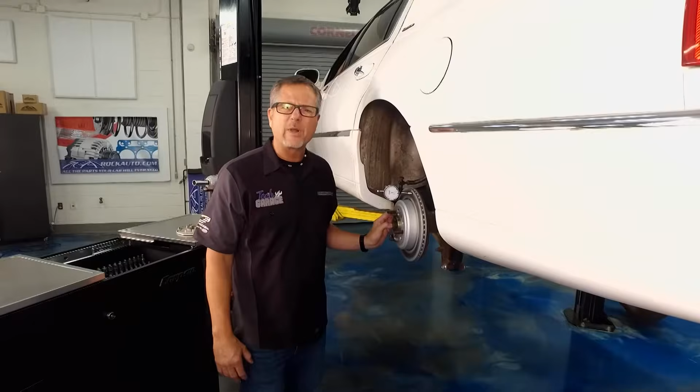Man, so much brake chatter, I almost chipped my teeth. We just did a brand new brake job, so we know the parts are good, but check this out. Holy mackerel, 43 thousandths run out in that hub assembly, rotor. Something's going on. Further diagnosis is needed today on Tech Garage.

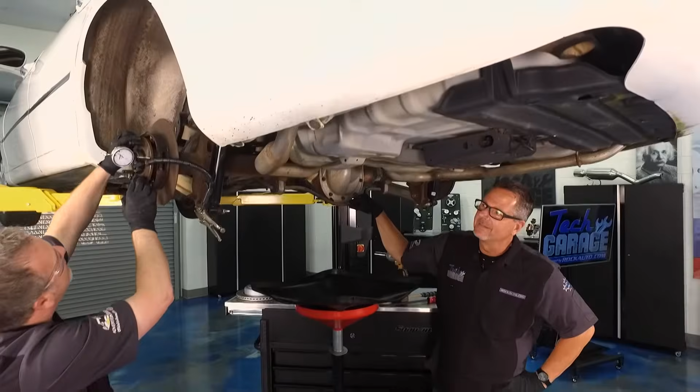Oh my goodness, Johnny, I found the run out. We took the rotor off, we know that wasn't the problem, and it's looking like it's from the hub back here, so somewhere in the axle. Boy, did you ever.

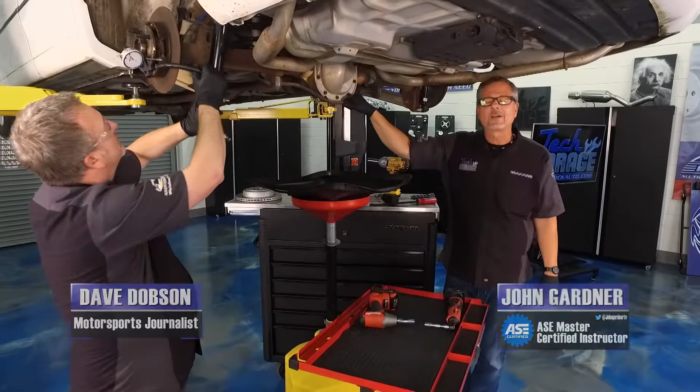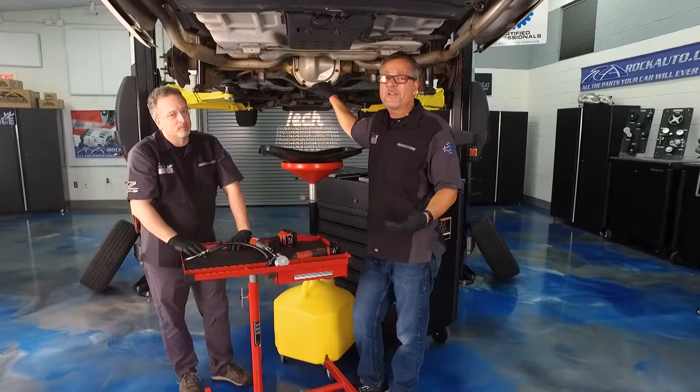Now you're probably wondering why we're starting the show with these black gloves on. Well, we know we're going to get goopy with some differential fluid. Yuck. What we need to do is, we actually had run out, chattering in the brakes. We took the rotor, measured it, we had a ton of run out. We had brand new parts from rockauto.com, so we know that wasn't the problem. So we went ahead a little bit further, diagnosed the hub, and the hub's warped.

Now, we don't know if it's the hub or the axle or what's going on, but Dave, we surely know we have to open up this differential and get this axle out of here.

Before we do that, how does it get like that? You hit a curb probably, I'm guessing. Me? Yeah, you hit a curb. No, sir, not it, not it.

But I can tell you, I think I've heard of cases where this happens if maybe there's a bumpy road, like big bumps, and you get on the power real hard. Yep, and there's some horsepower in this thing, so that can happen, things bouncing up and down. Absolutely, it's supposed to ride like a Lincoln. Right now, it's riding like a baby buggy.

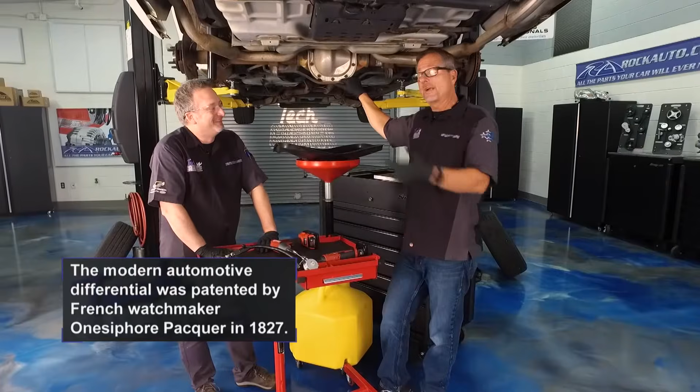But anyway, we're going to have to get into this differential and do that. So take a look at what we're going to do. We're actually going to go in here and take these bolts out. There's going to be a C-clip, Dave, that's going to hold that axle in. It could be bolted in or it could be C-clipped in, depends, we'll look when we get in there. But we need to take these bolts out, that's probably the first thing. You give me a hand, we'll start taking these out.

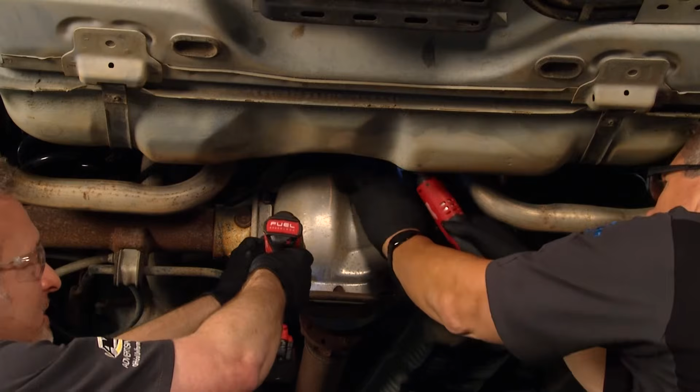Got it, there's fluid in here. This would be a good time to change it as well. So I guess it's all right that we're doing this anyway. Yeah, and when you change the fluid, we'll talk about it a little bit later, we got to make sure we have the right fluid. Sometimes there's additives, and like you said, there's a service interval for this anyway, so if you're servicing a differential, you're getting a little bonus as well.

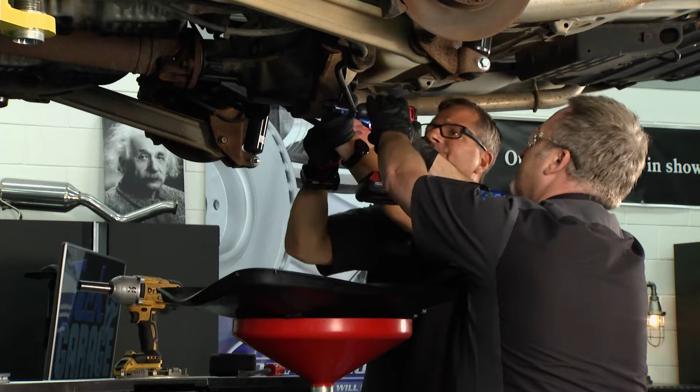Perfect. Now when it comes to these differentials, man, they could be either, bearings could be on the end with 4 bolts, a lot of Fords do that, we have to use a slide hammer in order to get it out. But in our case, I'm hoping they're C-clips, and it's pretty interesting.

But Dave, here's the problem, we got all the bolts out minus one, and it's not coming out. And I knew that was going to happen, because I don't know who's going to take the bath, me or you. The old-fashioned way, yeah, you ready? Let's see if we can. I can smell this already, by the way, this is pretty gross, see if we can work this thing off. It's not going to be pretty, and it's not going to be easy. Oh, hey, no bath, but ooh, if this was smell-o-vision, you like that?

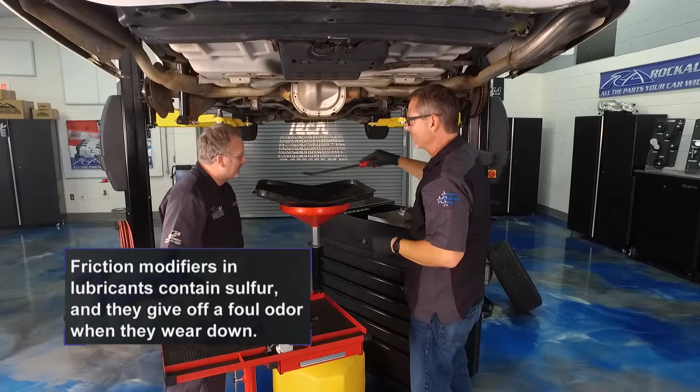Oh, that's fantastic. There you go. Wow, so this thing needed a service anyway, didn't it? It certainly did, so it's good that we're checking this out regardless.

Well, we'll let it drain for a second, let me see if I can pop it off. Oh man, look at that. Watch out, I'm going to sling it your way. Yes sir. Oh, it's stuck up there. Boy, it's up there good.

All right, you shove it up and out of the way, or you have to bring it down? I had to pull this little clip off of here, which is stuck up in there, which is no big deal, this is all part of the job. You guys just take your time, make sure you know what's holding it, don't break anything. Whoop, oh, just kidding. Thanks.

I'll put it on my head.

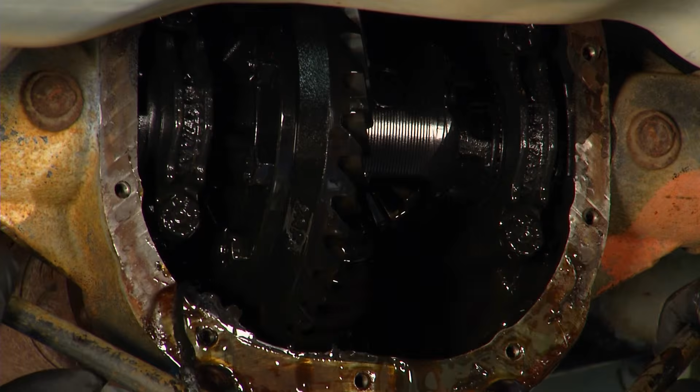Yeah, exactly, and I think you kind of touched on it there. That's a huge cause of breaking parts when you're changing things - just being impatient, trying to force stuff. With something like this, you've got to be gentle so you don't cause bigger problems.

Absolutely, and you can see our axle comes all the way through. You really can't see it, but Dave, I was smart enough to put it in neutral. Attaboy, so we can spin it around. You can actually see the clips inside of here. It's a pretty complex deal.

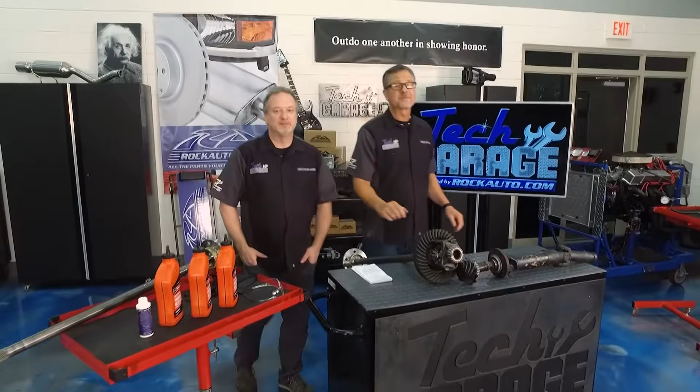Welcome back to Tech Garage, presented by RockAuto.com. Well, Dave, you made short work of that, man. You look like an expert. I think you'd done that a time or two. Yeah, and you gave me a couple of tips too that I hadn't heard before.

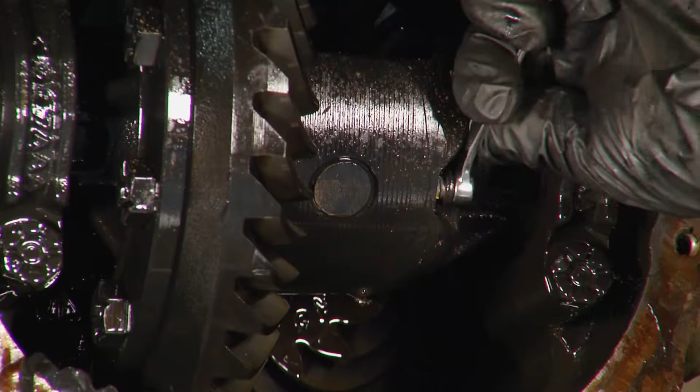So the process was pretty simple. We had the diff cover off already, so once you're inside there, you remove the pinion shaft lock bolt - simple as using a wrench to back that out. And that's going to free up the pinion shaft itself. You got to be careful because you don't want that thing to fall out all the way, because then your spider gears are going to fall out.

And you're going to address that - that can be a super mess. You don't want to do that if you don't have to. Yeah, I'll show them that in a minute, especially when you're in a differential.

And that pinion pin, sometimes that fluid's so burnt, Dave. I've seen them - we had to get a hammer, tap it back and forth. It may not fall out that easy. I've seen them so gummed up before, you got to clean that whole differential.

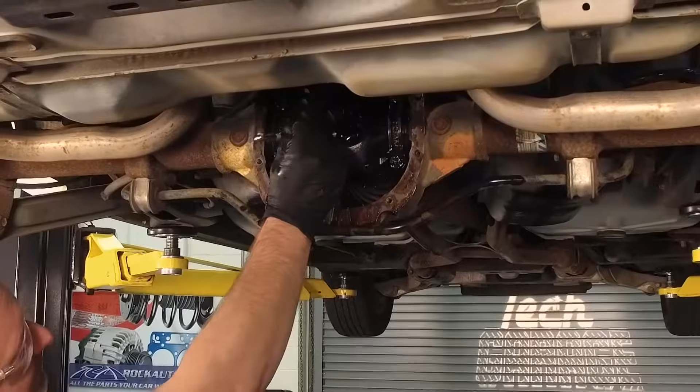From there, getting ready to actually take the axle out here. So you want to push the hub, and then push the C-clip out from the side gear and expose that. And then I was able to go in with a magnet and just get that out of there. Right, sometimes you can reach up there with your finger and grab it. Occasionally it's going to fall down actually to the bottom of the differential itself - you just use the magnet and pluck that out of there.

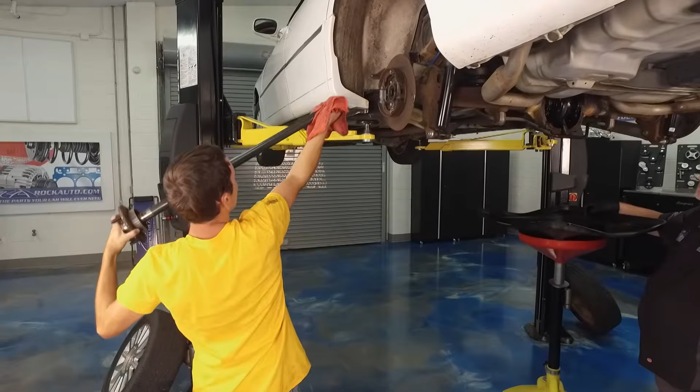Then it was time to pull the axle out. So we took that and yanked it right out of there, and we were ready for our new axle to go in. Absolutely, and you know, a couple things, you get the axle out of there, there's some end bearings on this one - sometimes they're pressed onto the axle. We'll go ahead, we'll replace our end bearings and get them all in good shape. That's a whole nother show.

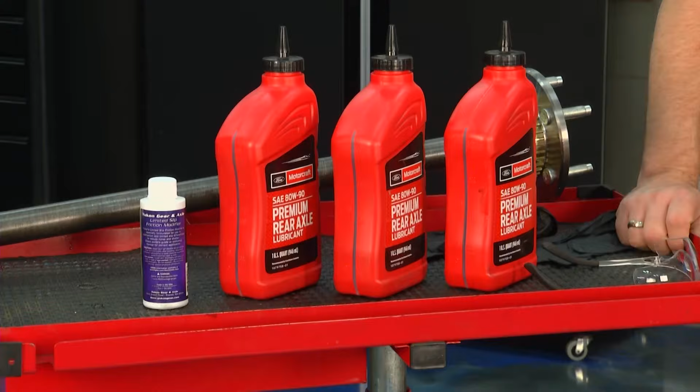Fluid, just as important, Dave. You got the right fluid, my friend. You got it, John, you're going to show us here. So this is a really complicated machine right here, and things have gotten tighter and tighter with tolerances. Things are being made by computer, cut with lasers and stuff like that. So you've got tight tolerances - you want to make sure you're using the right fluid. It's not like the old days, just dumping any old fluid in there.

Exactly, and we got some additive on the table. You're not going to need it, but sometimes there's what they call Positraction. It's actually limited slip - there's really no positive where they're locked together, but limited slip, you're going to have some clutches in here. You're going to need that special additive, just like you would in any clutch pack, so it wears properly and you're turning around the corners. I'll show you how it works in a minute.

Looks like you got your hands full with a lot of work. You got it, I'm going to go get to work, sir. You do that, all righty. Meanwhile, let's check out a whole differential and how it works. This is pretty neat.

So I've got a little mini drive shaft here because this is coming out of the transmission and it's heading over to what's called a pinion. It drives the pinion right here. These U-joints are connected to a yoke over here, and you're driving your pinion. Now your pinion's going directly into here, which is called the ring gear.

This is what Dave was dealing with. This is actually a whole carrier assembly, and what's happening is I'm going in this direction and transferring out to the wheels. Now this is a Hypoid cut gear, which is pretty cool. It's not as strong as a straight cut or spur cut gear. In reverse, when you back up, that's a spur cut gear, and when you're going forward, they're Hypoid cut gears, so they're a little quieter, but still strong.

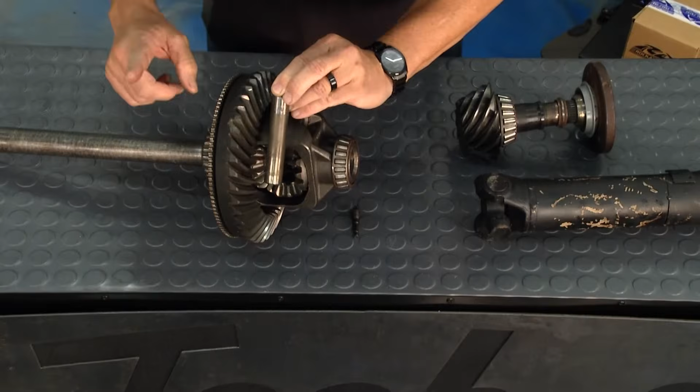Now, right now, the clip won't fall out. He said a lot of times it will. He reached over here with his arm, pushed it in, and voila, there's the clip. Just that easy, it's going to fall out. Now it might not go that far because you've got the other axle on the other side, but there it is. There's the actual C-clip.

Now the axle's free to come out, so we can go ahead and remove the axle. Let's see, that's a heavy one. All right, put that right there.

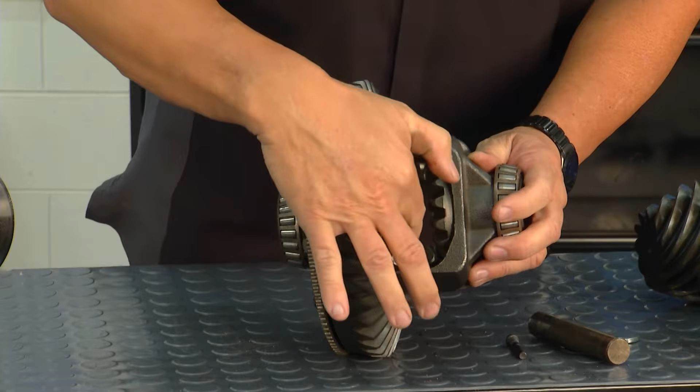Now if you look inside of here, you've got two things going on. You have side gears and pinion gears. Why is that? Well, if I turn the axle, I want to be able to turn the corner at a rate where both axles aren't locked together.

And you can see it right there, I'm turning it. That's what the pinion gears allow you to do, turn without getting any damage to the car. So I'm going like that, and they're spinning at different speeds.

Now I can actually pull them out here. And what's going on when I pull them out, there they are. There's your pinion gears. Dave said he locked it so these wouldn't fall out. And if I push on this one, there's the side gears. So the side gears are running around the pinion gears, and the pinion shaft's driving the ring gear.

Man, we're up and going. Hey, let's check in with Dave and see how he's coming along.

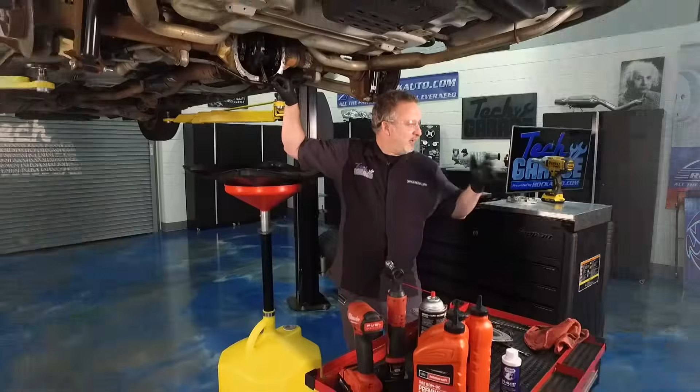All right, John, we're going to reverse the procedure we saw just a minute ago. Now we've got Benjamin, our assistant, over here giving us a hand putting in the new axle. Go ahead and bring it in. It's pretty delicate, and you got to remember, you only have to move it a little bit down at his end to find the mark there and get it between the side gears, and he's got it popped in.

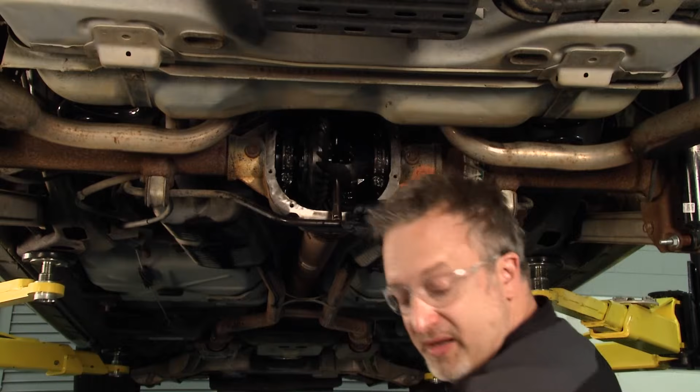Very cool, so now we're going to get our C-clip. I should be able to put it on there by hand. Back in the spot, let's see. There we go, we got it seated. Now pull it back out, and that'll seat it there in the side gear, and we are good to go. Thanks, Benjamin, we are good to go.

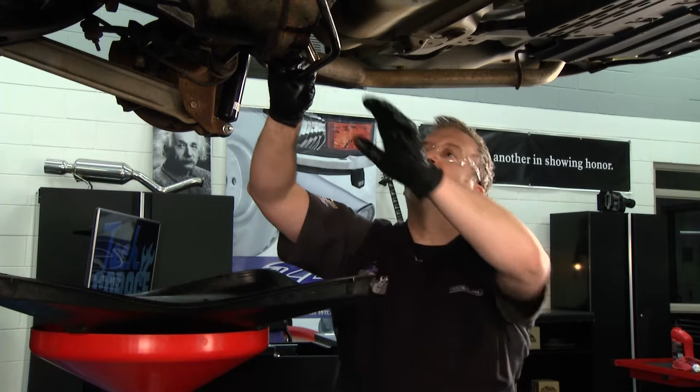Now we've got to put the pinion shaft back up, and then the lock bolt that goes in, that'll hold that together, and we will button it all back up. But before we do, I want to show you this. This is the differential cover, and it was nasty before this.

It had goop all around it. We went outside with a wire wheel and cleaned that off. We also cleaned the other surface here on the casing to make sure this is free of all kinds of debris, because if there's anything on this, it is going to create lots of problems down the road, and you're going to have to do this job twice.

We are rocking and rolling right along here at Tech Garage. Welcome back. Well, it's all about Garage Ed, and we're talking tire service. If you joined us last week, we know everything about the tire fundamentals. It only makes sense to turn our attention to tire service.

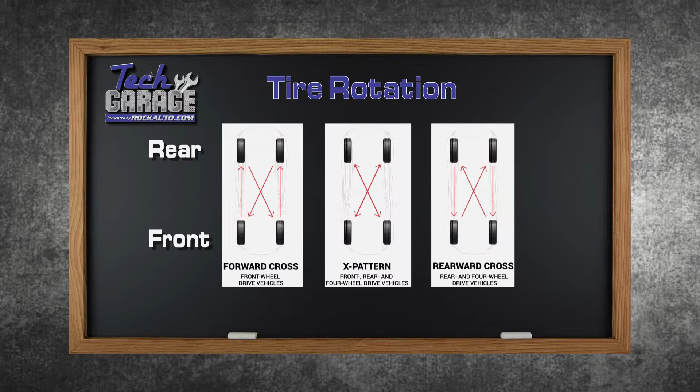Now, what do you want to do with your tires? Here's a couple of simple things. First thing you can do to extend the life of your tires is do a tire rotation. And you can see it right here. Now, depending on the vehicle, a lot of front-wheel drive vehicles, you can see the forward cross. That's a method to do it. You can do an X pattern there if you have a 4-wheel drive, or you can do the rearward cross.

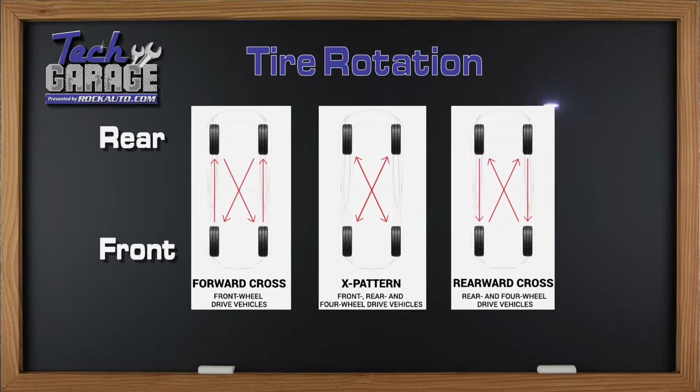There's 3 different ways to do it, but definitely look at your tires. You may have different size tires, or you may have directional tires. So in that case, you may not be able to rotate them at all. In the shops, a lot of times we just like to put the front to the back and the back to the front to stop any pulls, so we don't have any tire pulls or tire issues.

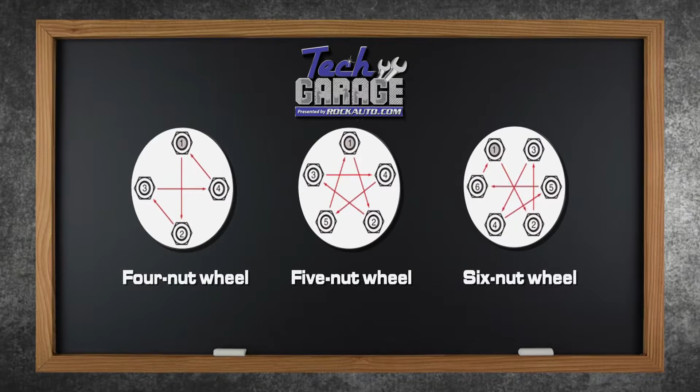Now, another thing, super important, when you put your tires on, you want to make sure you torque them. Torque the lug nuts. Why? Well, first and foremost, you don't want to warp that hub or warp the rim or do any damage, so you can always do it in a star pattern. You can see right there, you have a 4-lug nut, 5-lug nut, or 6 or 7. It doesn't make any difference. The point is, go in a star pattern. Go across from the lug nuts back and forth.

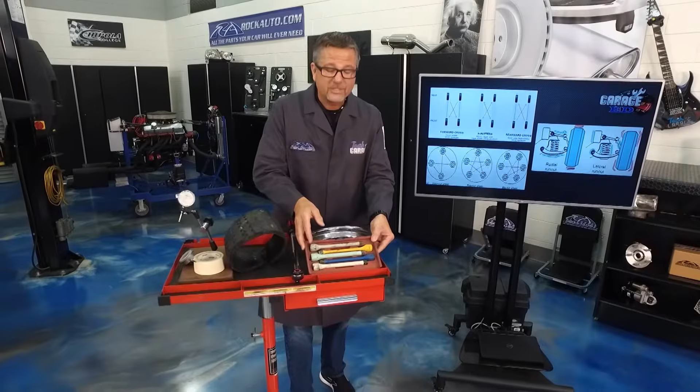Now, when you're torquing them, you want to use the proper torque specifications. You can use these right here. These are called torque limiting adapters. We actually call them torque sticks in the industry, and these things here kind of flex at the right torque, so you know you're getting the right torque when it comes to putting the lug nuts on. Still in a crisscross pattern. Or you can use an old torque wrench. That's the best way to do it. Just wait for the click, put it to the proper thing, you'll have no issues.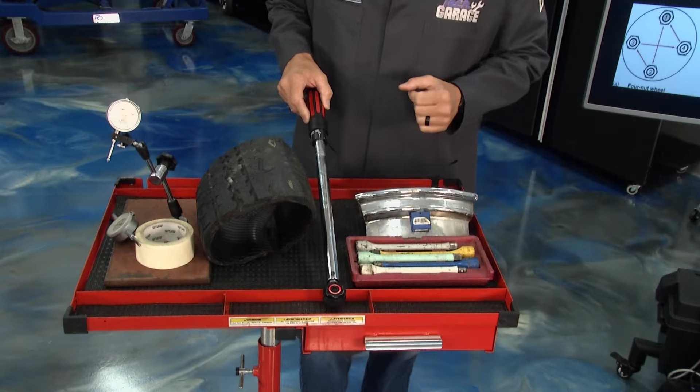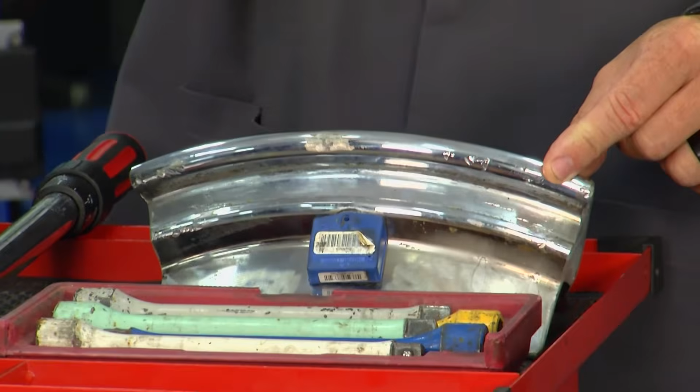Now, also be careful. When you rotate the tires, you may have a tire pressure monitor. Now, the tire pressure monitor, it may have to be relearned to where the tire position is, so on the dash, it doesn't come up with a false reading. You know, that's a whole nother show on Tech Garage, and we'll take a look at that in a later season.

Now, when it comes to tires, you also want to be able to read the tires. Right here, you can look at the tires, and you can see that there's some wear here. We need to know what's going on with that, along with 2 measurements called lateral and radial runout. Lateral and radial runout, you can see the radial runout is basically bouncing up and down.

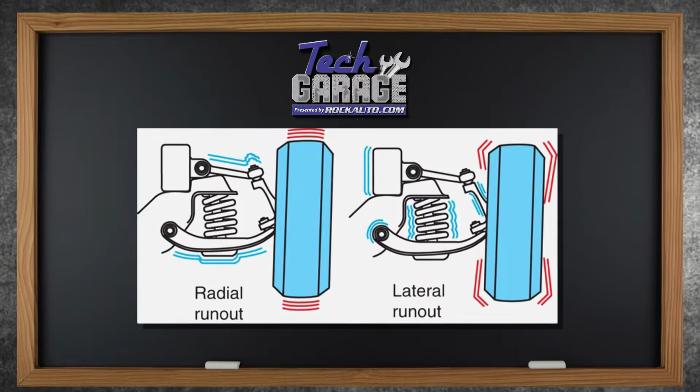That's when you get that hop in the car, and then you may have lateral runout, kind of the shimmy in the seat, that side to side, but we're going to have to do that with a dial indicator, some tape. We need to understand about all that stuff. We need a little help. Dave, how about a little help?

Well, glad to help out here, John. As you mentioned, 2 types of runout. We've got the radial runout, which is what we're testing here, and lateral runout, which is side to side. We'll talk about that in just a minute.

So you can do this on your driveway. You can set your car up on jack stands. We've done it here on the table, and it's not going to be real precise because you can wiggle the table here, but it doesn't have to be that precise. You have to see the gauge move between 45 and 60, 1/1000th of an inch, and I don't think it's going to move that much.

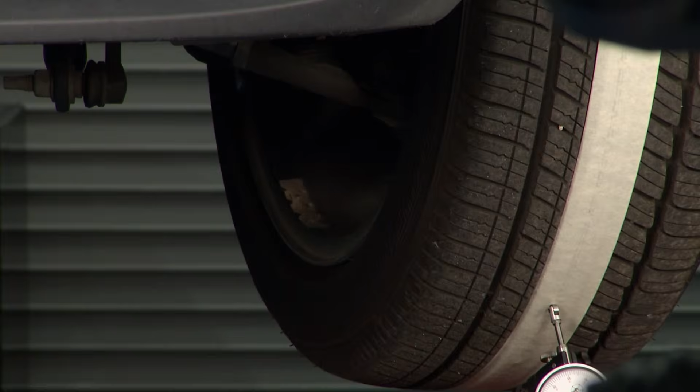And as we look here, this tire is pretty good, moving it no more than 10 in each direction, so we are just fine. By the way, a little trick here that my buddy John Gardner taught me: you don't want to get this dial indicator stuck in the grooves of the tire, so you just run a piece of tape around it, and it's nice and smooth as you go all the way around the tire here. So again, taking a tour of our tire, we see that it's only deflecting just about 10/1000ths in either direction, so we are just fine.

Now, testing the lateral runout of your tire, again, moving from side to side, you do the same thing. You put your dial indicator here on the side, you run it along the sidewall. Sometimes a belt might shift or something in the tire, ends up being warped, and that's the shimmy you feel going down the road. And believe me, you'll know it when you have problems with that. Measuring to the same tolerances and measuring the exact same way, that is how you get your lateral runout.

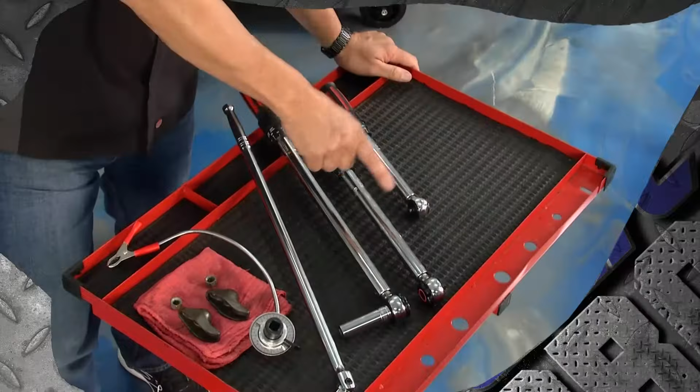When we come back, we're going to learn all about torquing bolts, and there's a whole lot more to it than you might think. So stay tuned to Tech Garage, presented by RockAuto.com.

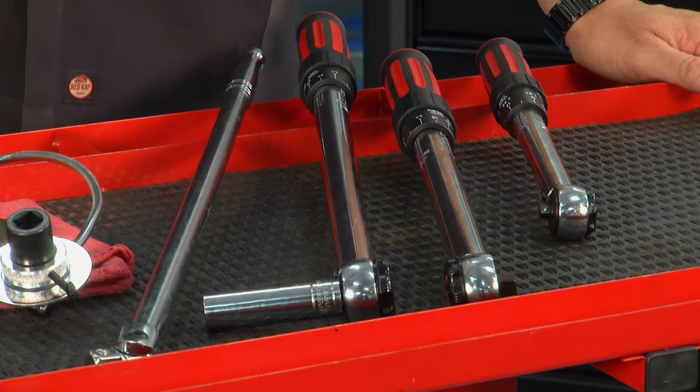Well, you want to grab a torque wrench, and RockAuto.com has a whole line of torque wrenches, all the way from a 1/4-inch drive to a 3/8 drive to a 1/2-inch drive. What do you want to do? Well, if you got a little 10mm bolt, you definitely don't want to put a 1/2-inch torque wrench on it because it's too small. You want to use the little one. So the torque specification is really going to dictate what torque wrench you use.

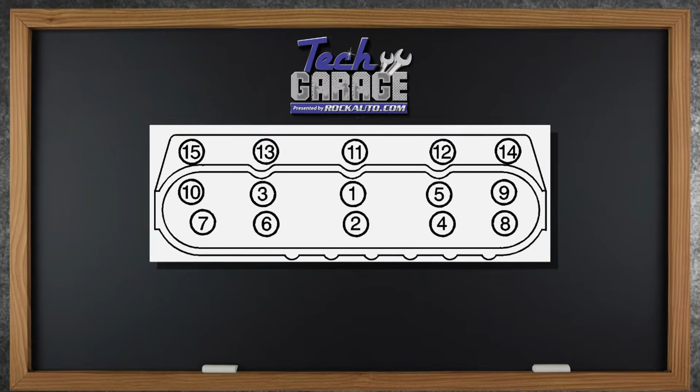We're going to do it on head bolts, and really there's a sequence to it and a specification. Look at this graphic right here. You can see the actual sequence. It goes 1, 2, 3 in order, working your way from the middle out, and then you're working the top bolts. That's very important to get that even distribution of torque.

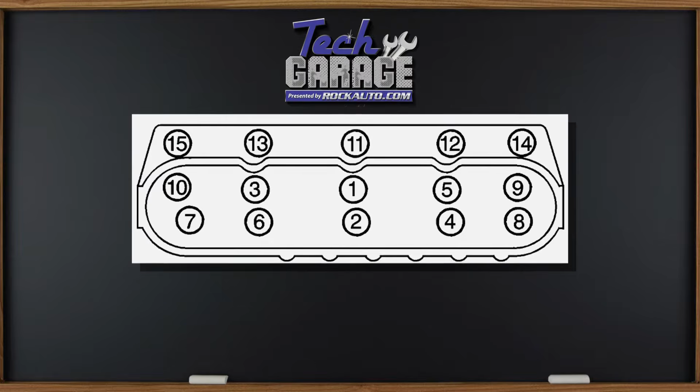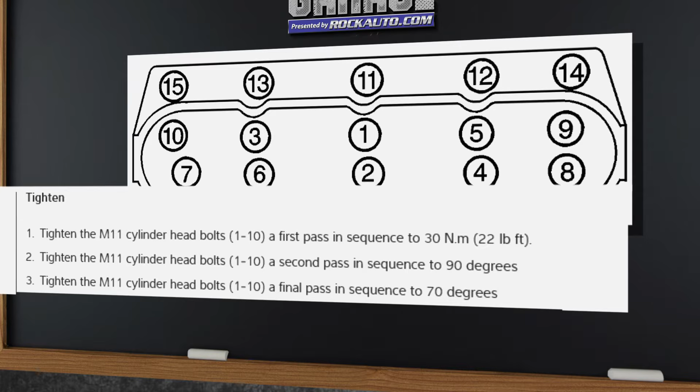Even more important, you have the specifications. And if you look right there, you can see it's 22 foot-pounds. That's not a lot, I know what you're saying, but then they want an additional. So you put the 22 on it, then you put an additional 90 degrees, you come around again with another 70 degrees, which puts it to its final torque. Super, super accurate. And I can show you how to do it right here.

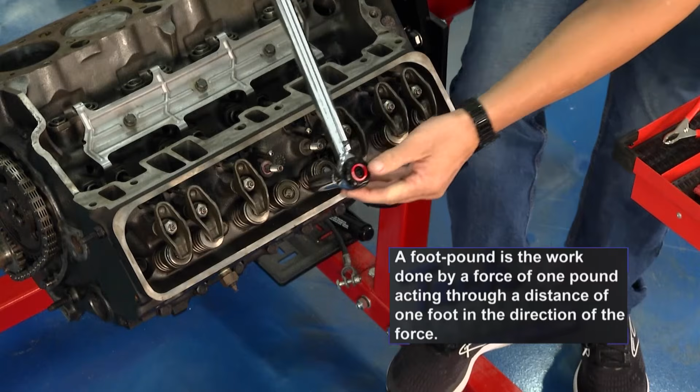We'll go ahead and we'll use the 1/2-inch torque wrench, and I'll come down here to this center bolt just for demonstration purposes. I got this thing set up at the first torque, so we'll come down here and we'll get a little click in it right there. That's good. So we know we're at that point. So it clicked and we're safe with the first torque.

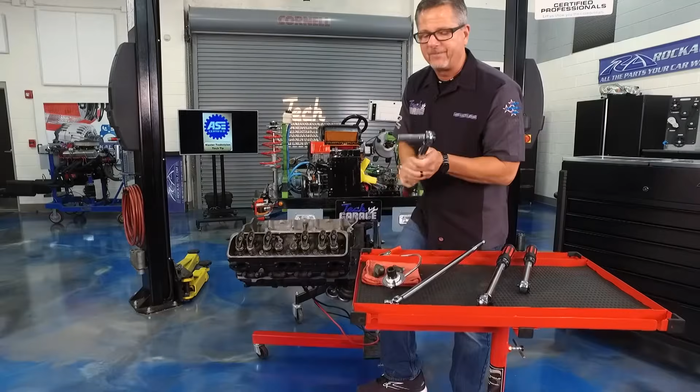Now the key is this torque angle gauge. This is pretty neat. I'm going to set it up right here on the bolt and show you how to use it. So we'll put it on the bolt - what's going on here, this is actually moving. So we want to fix that base so we can get a fixed reference point right there.

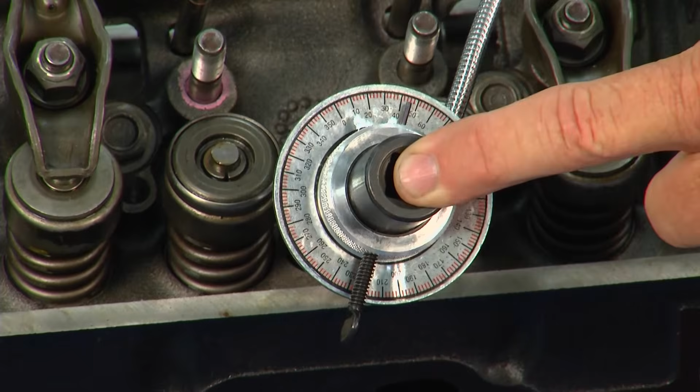Now we're fixed, and then I'm going to take this and set it on zero. Why did I do that? Because now everything's fixed, so when I turn the bolt, this gauge is going to move with it. I'm going to try to get this down here out of your way so you guys can see it at home.

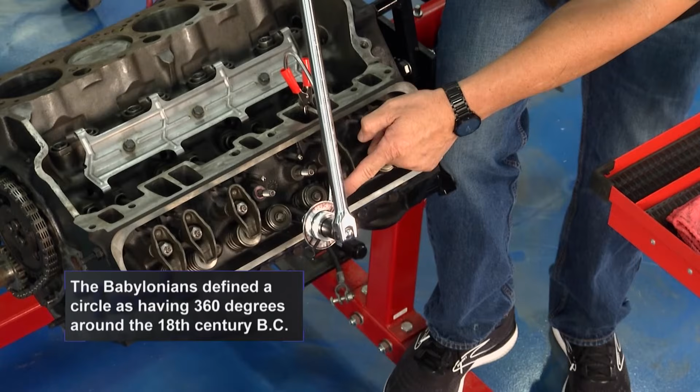Go right here, over on this side. I'm going to pull across the motor. Now watch this gauge - as I pull across the motor, that gauge is moving. So I just go on to whatever the specification is, go around, do all the bolts. You can see it moving, and that's giving me a perfect, accurate torque specification every time. That's critical - make sure you use the right torque specifications and use the right torque sequence.

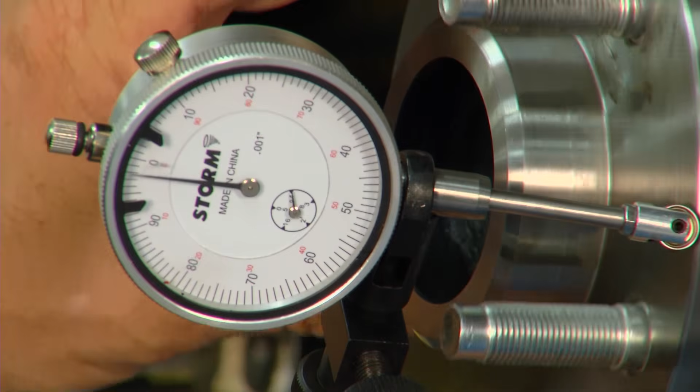Wow, look at that - almost nothing, just a couple of imperfections there, dial indicator lift that could be, but boy, what a big difference, Dave. Holy moly, I'd call that success. I call it two-zero, baby. Absolutely, it was a pretty simple job. I mean, you made it look easy, that's for sure.

Well, I appreciate the coaching, first of all. I got some tips and tricks that kept us from letting those spider gears fall out of there and a few things to make the job easier.

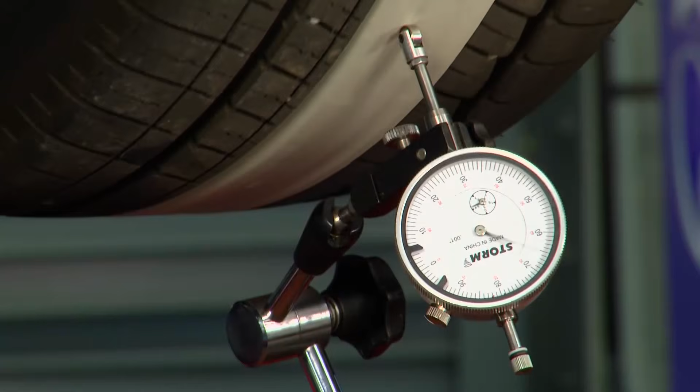Yeah, and we're getting pretty good with the garage. We had tire service, that was dial indicator, lateral run out, radial run out, tire straight, rotor straight, hub straight - we're rolling smooth, baby. And we also talked about torquing properly. That could lead to problems with all the aforementioned there and a whole lot of problems all around the car. Make sure you check your service manual to make sure you're getting all the proper torque specs on everything you do on the car.